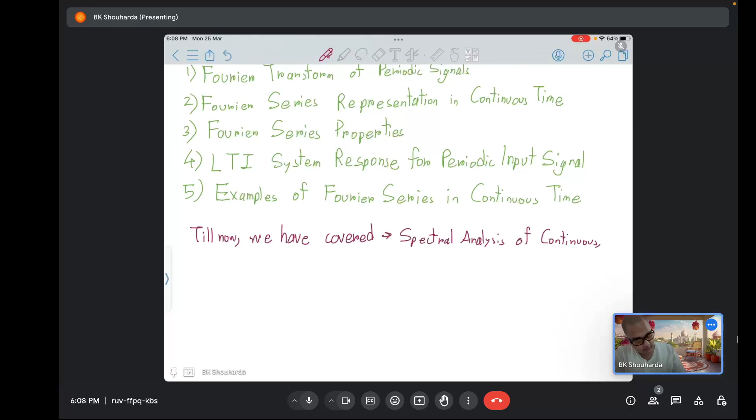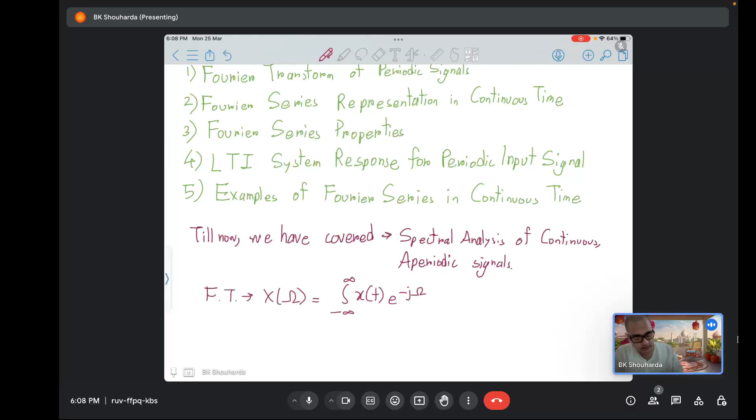So till now we have covered spectral analysis of continuous and aperiodic signals. Whenever we studied Fourier transform, X of omega was the integral from minus infinity to infinity of x of t e to the power minus j omega t dt. There was no restriction on x(t); it could have some variation, but it did not have any period. It was a generic, continuous time signal. We are dealing with continuous signals for now.

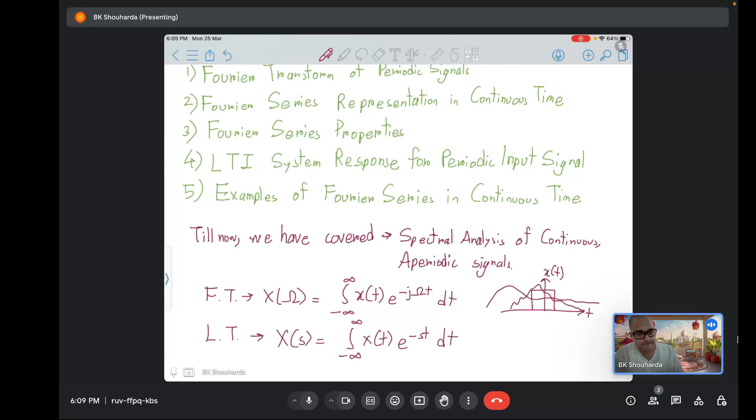And when we looked at Laplace transform, we had X of s is the integral from minus infinity to infinity of x of t e to the power minus st dt. So all of this holds for signals which are continuous and aperiodic. Now why am I saying aperiodic? Because one of the Dirichlet conditions, or DC in short, states that over the entire timeline from minus infinity to infinity, the integral of the absolute value of x(t) dt must be less than infinity. So the area under the signal must be finite.

And there were special cases, one being sin omega t and cos omega t. These were periodic signals, and we did not get to them directly. We made certain modifications or assumptions to assign sin omega t and cos omega t these spectra. The spectra of sine and cos are not normal functions; they are made of impulses, which are not standard functions whose differentiability, integrability and finiteness hold. We do it to make our analysis complete, because sin omega t and cos omega t are very important functions.

So let's say the triangular wave that you can see over here is our periodic signal. So you see, the signal is nothing to be scared about for not being able to do the spectral analysis. See, if I consider a finite window, and let's say the window has to be of the time interval T, and this entire window repeats itself. The window length is the time period of the signal.

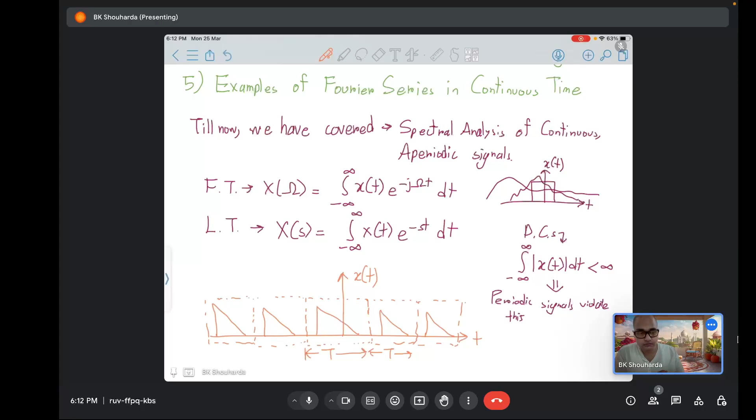Alright, so if I'm sticking to this small window and forget everything, and I do its spectral analysis, wouldn't that be useful? So what happens actually is that when we work with continuous time signals, we consider the signal within the window of the time period and then extend the properties. Okay, so periodic signals are a special case of continuous time signals, and correspondingly we have their spectral analysis or representation. I am not going into the proof of how we get the Fourier series from these things.

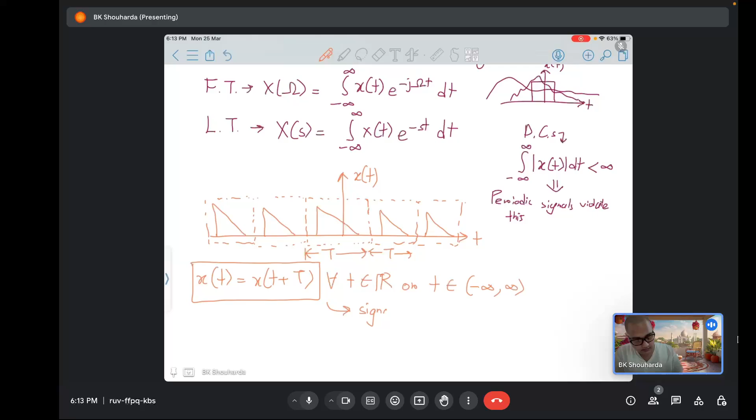So x(t) equals x(t + T) for all t belonging to the set of real numbers, or t belongs to minus infinity to infinity. This condition implies that our signal is periodic. All right, and what is the Fourier representation? We say that such a signal x(t), so these are periodic signals, and what is the most basic periodic signal that we know? Sinusoids, or cosine waves, or complex exponentials, right?

So just like the intuition of the Fourier transform, where we take all possible frequencies from minus infinity to infinity, or 0 to infinity and then their conjugates in case of real signals, we assign some weight to each sinusoid, add all of them up and we get the signal. In this case, this is periodic. So we will not be using all the possible frequencies. x(t) will be made up of periodic signals with frequencies same as or multiples of this frequency. Here it is repeating with a frequency f naught equals 1 upon T.

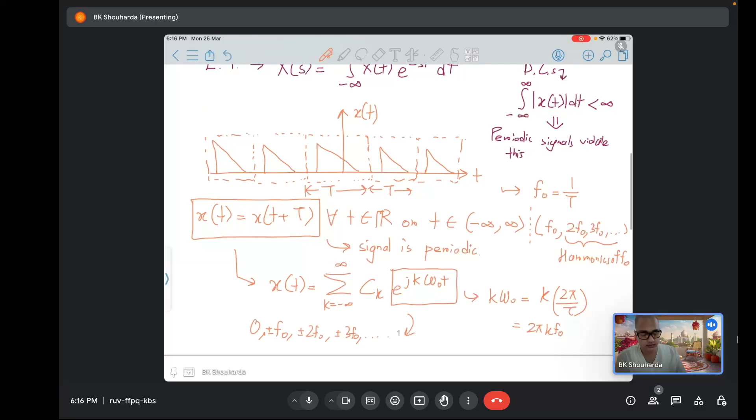Okay, so this is a complex exponential with frequency k omega naught, where omega naught is 2 pi upon T. Or you can also write it as 2 pi times k f naught. So you have the DC signal 0, plus minus f naught, plus minus 2f naught, plus minus 3f naught, and so on. So it's made up of complex exponentials. That's one way of writing. This is called the complex exponential Fourier series.

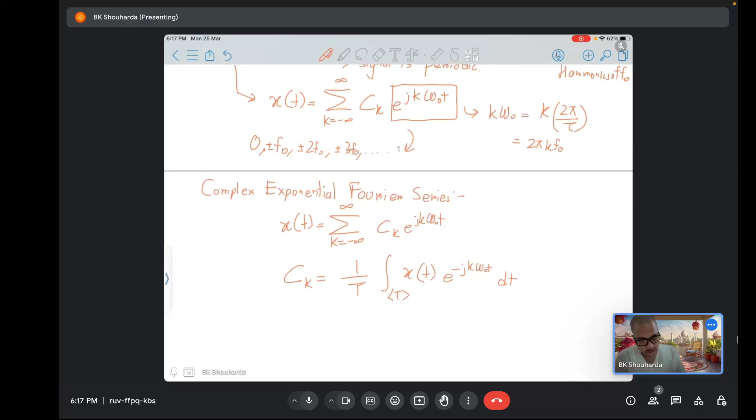x(t) is the summation from k equals minus infinity to infinity of c_k e to the power j k omega naught t. So what is the frequency component, the spectrum? The spectrum is this value c_k, which is 1 upon T times the integral over any window of length T of x(t) e to the power minus j k omega naught t dt. And how will the spectrum look? When we draw the spectrum, we always draw two parts, magnitude and phase. For the magnitude, this is |c_k|, and this is k.

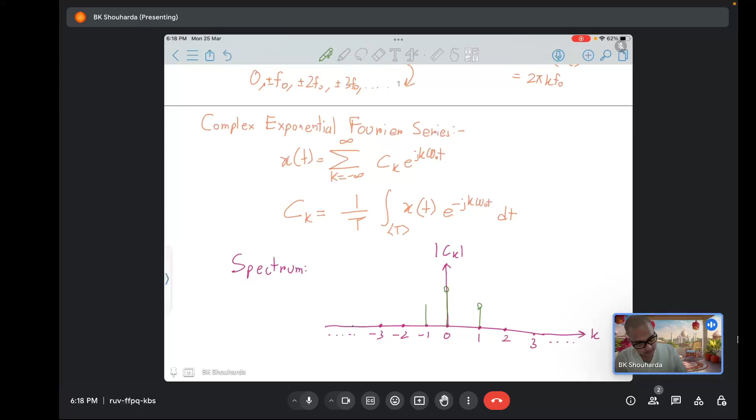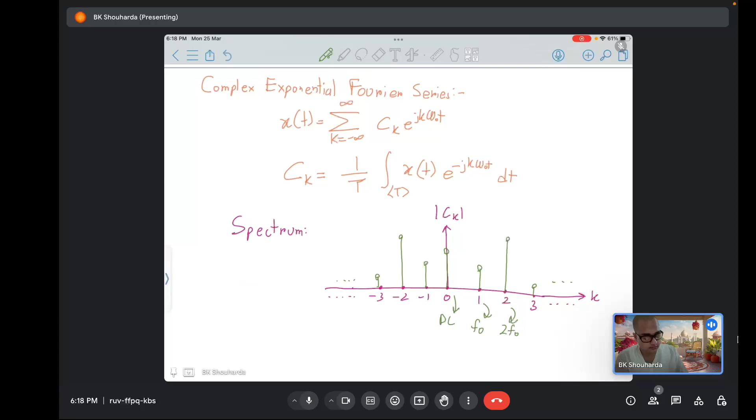So we'll have discrete indices 0, 1, 2, 3 and so on, -1, -2, -3 and so on. Let's say at 0 we have something like this, at 1 something like this. I'm assuming it's a real signal, so it will be symmetric. At 2, something like this, at 3 something small, and so on. So this is the magnitude of the DC component, this one is the magnitude of the sinusoid at frequency f0, this one at 2f0, this one at 3f0 and so on.

Okay, and what will the phase spectrum look like? Angle c_k. At 0, let's say it's 0, so you can't have any phase, that's a real signal. At 1, let's say something like this, at 2 something like this, 3 something like this and so on. At -1 it has to go down because it's anti-symmetric.

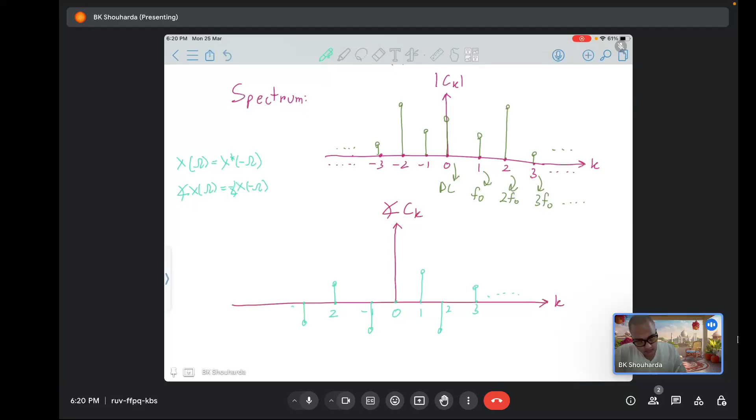Remember the property X(omega) equals X star of minus omega. So when you check the phase part, you get angle X(omega) is minus angle X(minus omega). Since the Fourier transform is more general, the same thing will hold for the periodic case. -2 will go up, -3 will go downwards, and this continues. Okay, so this is how the spectrum looks. So unlike the aperiodic case, where we used to have spectrums which looked continuous, in these cases the spectrum looks something like this.

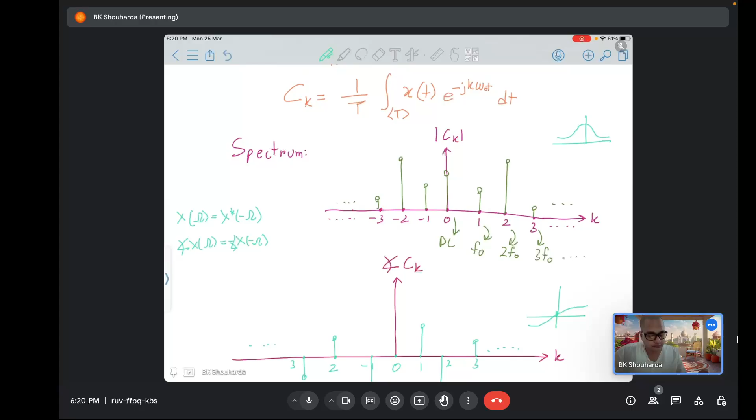That is not the case over here. Here these are discrete bins. Now this was the complex exponential Fourier series. Now there is another thing called the trigonometric Fourier series. What happens here? Here we write x(t) as a DC term, a0, plus summation over k equal to 1 to infinity of ak cosine k omega naught t plus bk sine k omega naught t.

So you see here we are writing it in a different way, but it's much more clear, much more intuitive, that we are writing the periodic signal as a summation of sinusoidal and cosinusoidal harmonics. Alright, where a naught is the DC or the average value, 1 upon T integral over T of x(t) dt, ak is 2 upon T integral over T of x(t) cosine k omega naught t dt, and bk is 2 upon T integral over T of x(t) sine k omega naught t dt.

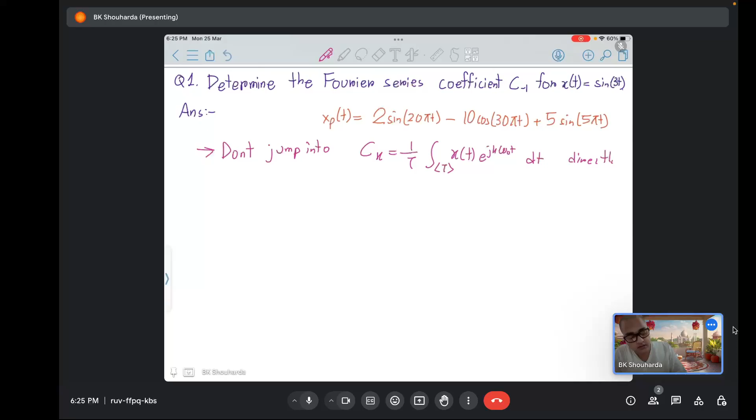Okay, so in those cases, don't directly jump into the formula. Let me give you another example. Let's say x(t) equals 2 sine of 20 pi t minus 10 cosine of 30 pi t plus 5 sine of 5 pi t. This can also be one example. I'll solve this later if you want. So for such questions, don't jump into ck equal to 1 upon T integral over T of x(t) e to the power minus j k omega naught t dt directly. Don't use this. Whenever you see only sines, don't jump into this.

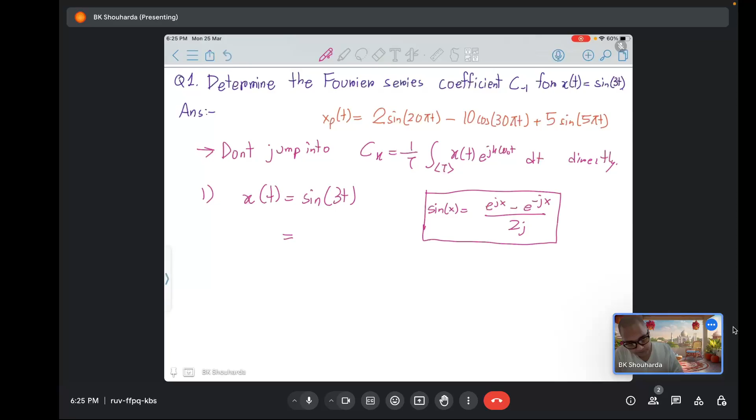What should you do actually? See, let's look at the first case. x(t) equals sine 3t. Now what is sine? Sine x is e to the power jx minus e to the power minus jx upon 2j, isn't it? I'll simply use this: e to the power j3t minus e to the power minus j3t upon 2j. Okay, now let's look at this. The fundamental is omega naught equal to 3 radians per second. So omega naught is 3.

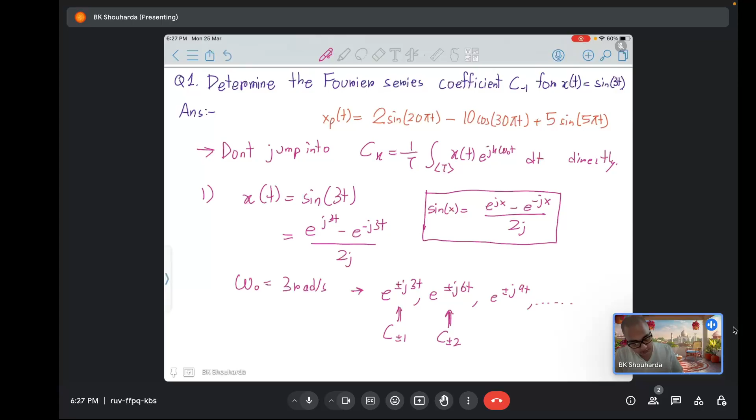So what are the multiples of 3 that you can see in this? You can have terms of the form e to the power plus minus j3t, e to the power plus minus j6t, j9t, and so on and so forth. We can have these exponential terms. Now this corresponds to k equals 1, c plus minus 1. This corresponds to c plus minus 2. This corresponds to c plus minus 3. Alright, so now what are the terms visible?

x(t): this is 1 upon 2j e to the power j3t. This is the first harmonic, the positive one. So what will I call this? I will call this c1. And why am I saying this? Because x(t) has to be represented as summation over k of ck e to the power j k omega naught t. Alright.

Okay, so I am trying to find out the ck's by looking at the exponential terms, and then we have minus 1 upon 2j e to the power minus j3t, because this is the negative first harmonic, so this is c of minus 1. So what do we get? We get c of minus 1 equal to minus 1 upon 2j, and this is our answer. Okay, now let me use the more elaborate one as well.

Copy image, paste image. Okay, so now in this case there are multiple frequency components. So first you have to check whether it's periodic or not. When there are multiple signals, then what do we check? We will check that, let's say their frequencies are f1, f2 and fn. We will check the ratios fi upon fj.

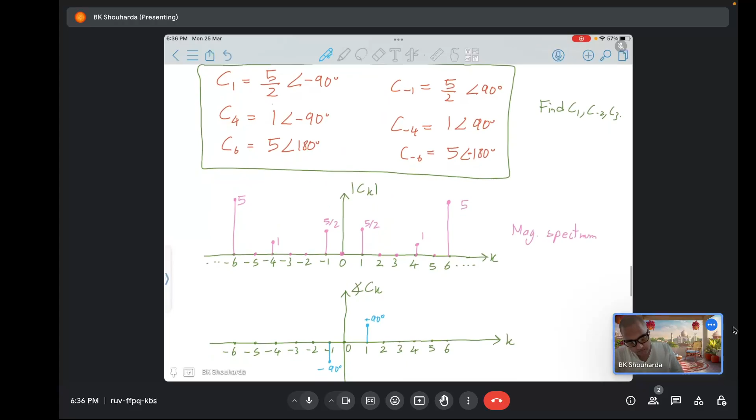Zero, 1, 2, 3, 4, 5, 6, minus 1, minus 2, minus 3, minus 4, minus 5 and minus 6. Okay, sorry, at 1 we have plus 90 and minus 90. Plus 90 degrees and minus 90 degrees. Okay, I think it should have been reversed.

Minus 90 degrees, plus 90 degrees, minus 90 degrees, plus 90 degrees, 180 degrees, minus 180 degrees, and this is the phase spectrum.

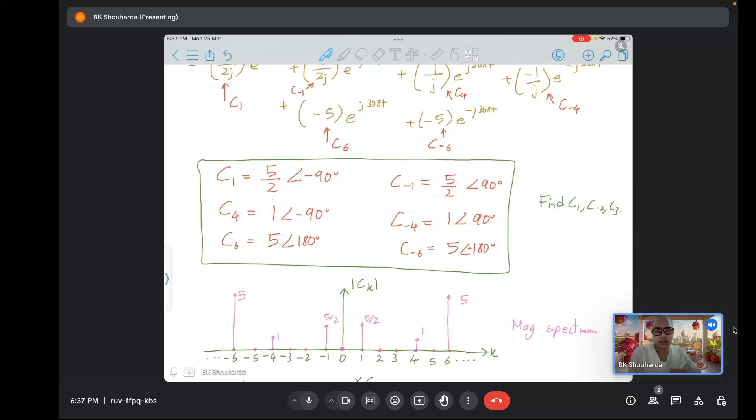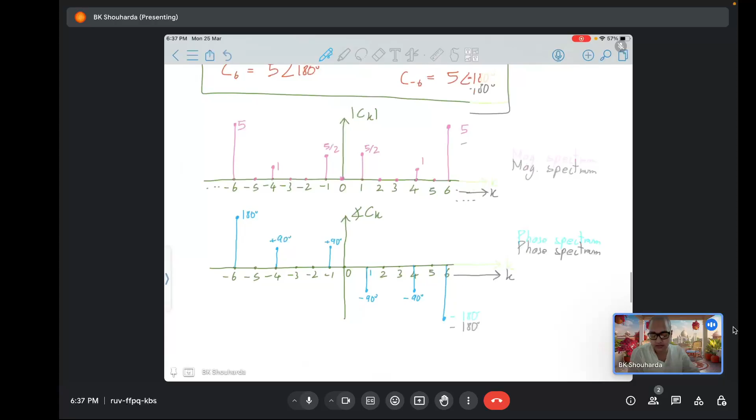So you see I have also given you an example of how to obtain the spectrum from this. In fact you do not need to draw this. Once you are able to get to this entire thing, you can easily check the spectrums and verify which one is correct, which one is wrong. So this is a very good and short way of solving this without going for the integral stuff. All right.

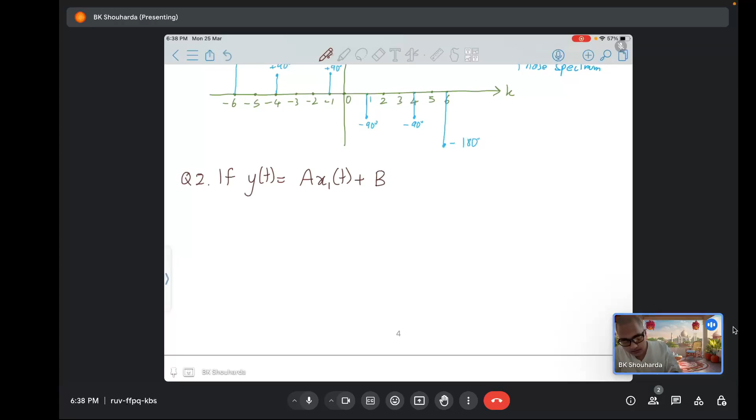And then the next question; I have actually told the answer of the next question during this explanation. If y(t) equals a x1(t) plus b x2(t), with period of x1(t) as T1 and x2(t) as T2, then the Fourier series for y(t) is only possible in case

option A, T1 plus T2 equals m for m belonging to the set of integers; B, T1 times T2 equals 1 upon m for m belonging to the set of integers; C, T1 into T2 equals m for m again in the set of integers; and D, T1 by T2 equals m for m belonging to the set of integers.

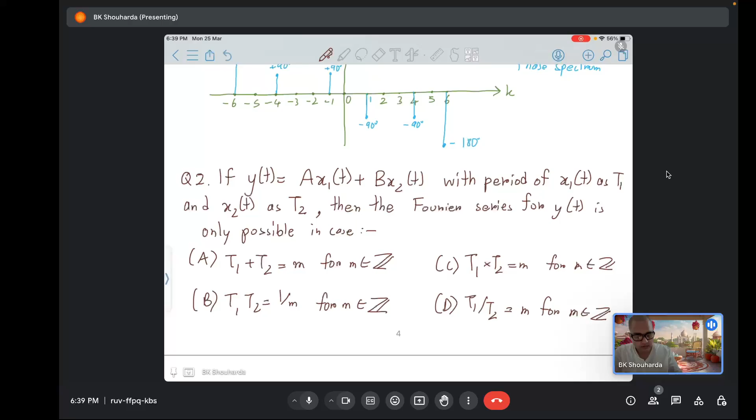Okay, so let me check once. Yeah, so if you remember carefully, we had talked about this, right? That we can write the frequencies as rational numbers, only then the signal is periodic. Okay, so which is the one that resembles closely? It's option D. T1 upon T2 is m.

So actually they are talking about the fundamental and harmonic and those concepts. Okay, so although it's given T1 upon T2 equals m, I'll give you a case where there's a periodic signal, but this need not be an integer. For example, let's say x(t) equals cos of 40 pi t plus sine of 60 pi t. What is the fundamental harmonic in this case? Here it's 20 hertz actually, and this one is 30 hertz.

So if you want to check the fundamental harmonic, what do we do? We take the highest common factor. Highest common factor of 20 and 30, what is that? It's 10. So basically these are harmonics of 10 hertz, that is 10 hertz is coming up as 20 hertz and 30 hertz. So the period T should actually be 1 upon the fundamental, that is 1 by 10, that is 0.1. Okay, so x of t plus 0.1, this is just for verification, nothing else.

Cos of 40 pi times t plus 0.1 plus sine of 60 pi times t plus 0.1, this is cos of 40 pi t plus 4 pi plus sine of 60 pi t plus 6 pi. So both 4 pi and 6 pi are multiples of 2 pi, so we have essentially the same shift of 0. So our signal is indeed periodic. You see, it's not necessary that T1 by T2 equals m, although they have given it in this previous year's assignment. It's a special case.

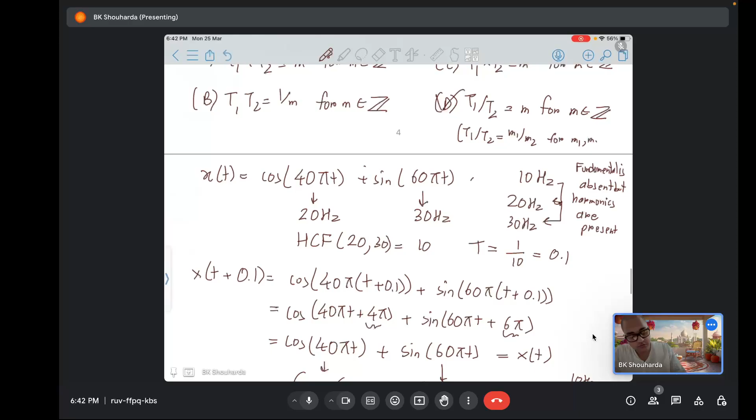So if once again I ask you to break this down, you will get c2 and c of minus 2, and here you will get c3 and c of minus 3, because c1, which corresponds to 10 hertz or 20 pi t, that 20 pi t term is not available in this x of t. So this is one thing to keep in mind. A signal may be periodic, but this is an example where the fundamental is absent, but harmonics are present. Okay, so in general this should be T1 by T2 equals m1 by m2 for m1 and m2 in the set of integers. Okay, so yeah, that's it.

Then question number 3: determine the Fourier series coefficients ak for y(t), which has a period T, where y(t) is equal to 1 for mod t less than T1 and 0 otherwise. Okay, so we actually need to find the complex exponential coefficients. So let us draw the signal first.

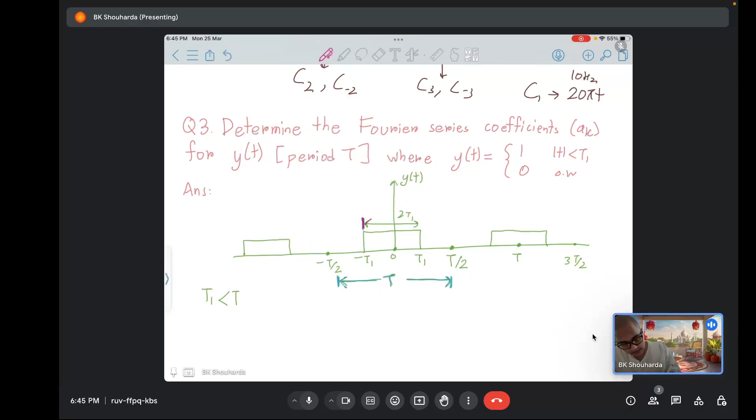So from minus T1 to T1, it remains like this, and it should be mentioned that T1 is obviously less than T, the period. From T to 2T this is 0. No, this should be T, this should be T by 2, this should be minus T upon 2, this should be 3T upon 2, and this is a width of 2T1. So you see this is a square wave that has a width different from the period. Let me use different colors. I have a window of size T, and here I am utilizing only a smaller part of it, 2T1.

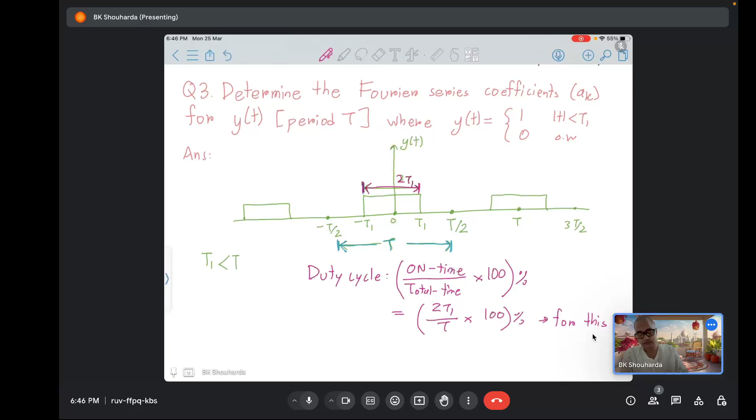So this ratio is called duty cycle. It is the on time divided by total time times 100. This is in percentage, or 2T1 by T times 100% for this question. Okay, so the normal square waves that we are familiar with in digital electronics, microprocessors, are generally 50% duty cycle, so they are on from minus T by 4 to T by 4, and for the rest half of the time they are in the off state. This is the duty cycle. Just stated it for general electronics knowledge. Now I'll show you the CK value.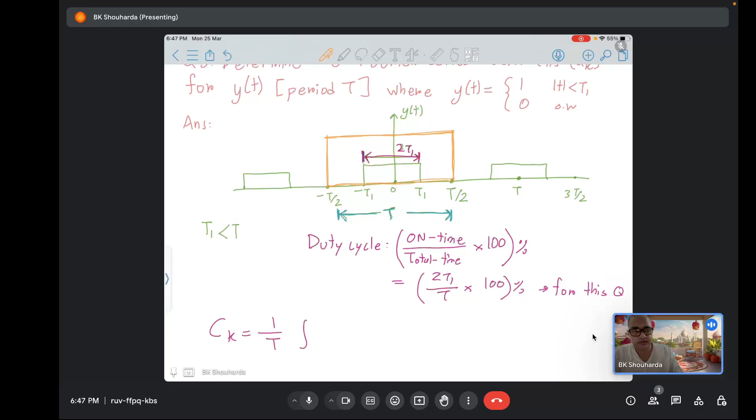CK is 1 upon T. What would be a suitable range of integral? The suitable range of integral window is this, because this is a symmetric window, and when you have symmetric things, a lot of the integrals become beautiful. We can apply symmetry properties; these complex sinusoids can turn into real stuff. Okay, so I'm taking the integral window from minus T by 2 to T by 2,

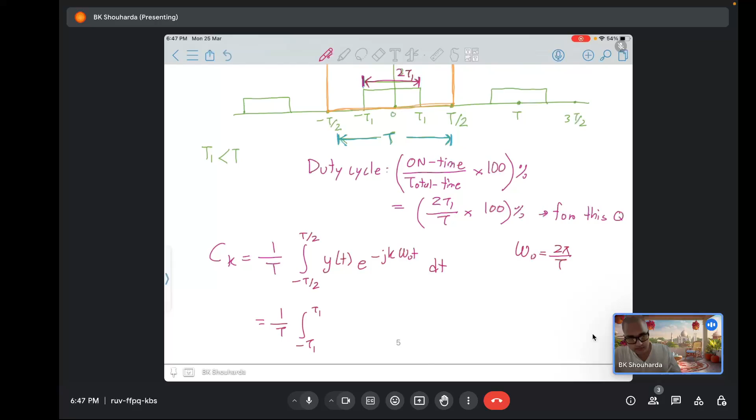y(t) e to the power minus jkω₀t dt. Omega naught is 2π upon period T, and if you see, it's actually on from minus t1 to t1 only. Okay, so 1 upon T integral over minus t1 to t1; y(t) is 1, so I am not writing it in this interval, e to the power minus jkω₀t dt.

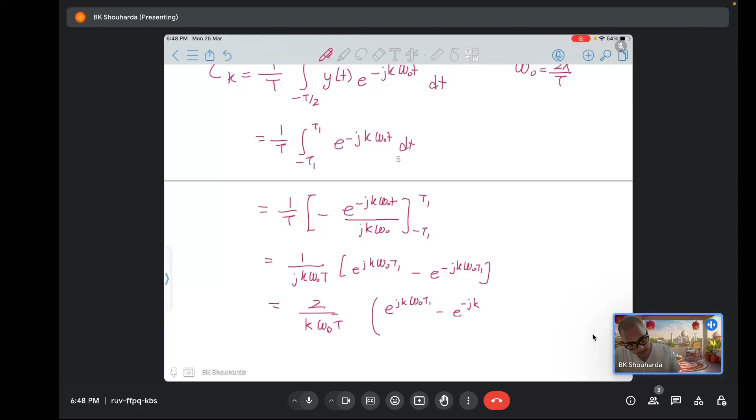1 upon T, minus e to the power minus jkω₀t, denominator we write jkω₀, from minus t1 to t1. 1 upon jkω₀T, e to the power jkω₀t1 minus e to the power minus jkω₀t1. So this is again the sin x form, so I need to take 2 from somewhere, so 2 upon kω₀T, e to the power jkω₀t1 minus exponential minus jkω₀t1, on 2j.

Now look at this, ω₀ into T is 2π, so 2 upon ω₀T will be 1 upon π. So what will I get here? 1 upon kπ, and what will be this over here? Sin kω₀t1. Okay, this is sin kω₀t1 by kπ, or 1 upon kπ sin 2πk t1 upon T. So you see, I can also write 1 upon kπ sin kπδ, where δ is 2t1 upon T, this is the duty cycle.

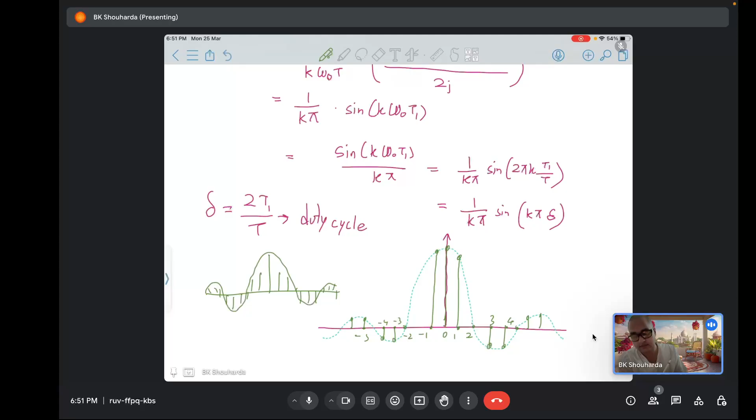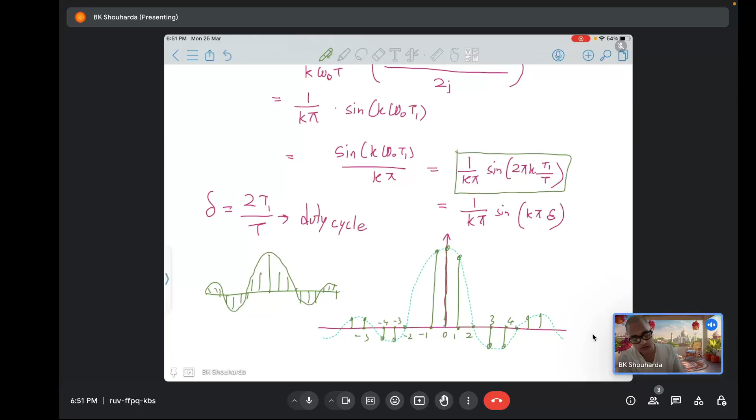pulses. From now on you must get familiar with this, because the same kind of functions are associated with pulses, and whenever you have a pulse you will see these waveforms coming up. Okay, so that's our answer, 1 upon kπ sin 2πk t1 upon T. This is a simple question, just the calculation was there, nothing else.

Then we have our next question. Time shifted signal x(t minus 3) will exhibit the Fourier series coefficient, in terms of ak, as: option A, ak e to the power minus j3kω₀; B, ak e to the power minus jkω₀ upon 3; C, ak upon 3 e to the power minus jkω₀ upon 3; D, 3ak e to the power minus jk3ω₀.

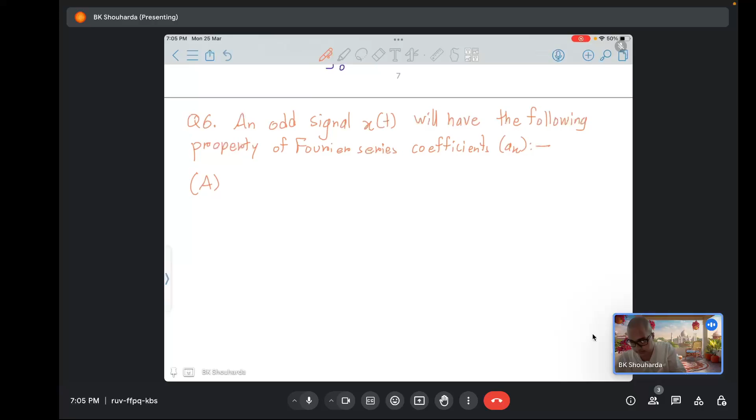Question 6. An odd signal x of t will have the following property of Fourier series coefficients ak: option A, ak equals a of minus k; option B, ak equals minus a of minus k; option C, ak equals minus k; and D, none of these properties.

So if you look at x(t), it can be written as summation ak e to the power j k omega naught t, and if you try to write x of minus t, you will see that it can be written as summation a of minus k e to the power j k omega naught t. Sorry, the minus sign will not be here. Now we know that for an odd signal, x of t is minus x of minus t. In order to do that, we should equate the Fourier coefficients. This is ak, and this one is minus a of minus k. So the Fourier series coefficients also behave in the odd way.

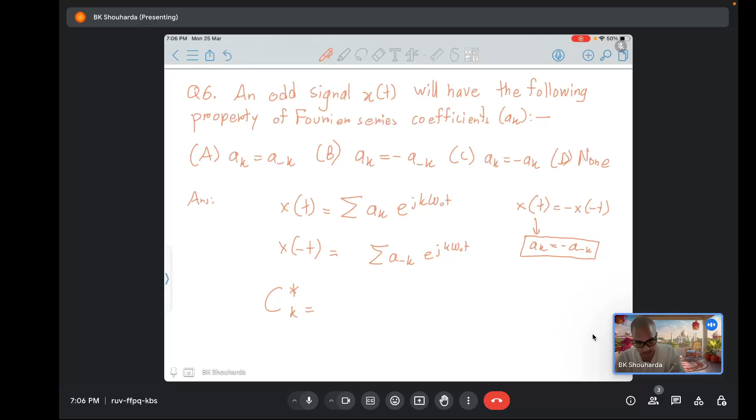So this is the answer. In general, actually, if you look into it, it should actually be C star of k is minus of C of minus k, because remember, for an odd signal x of omega is...

Okay, so ak is 1 upon T integral of x(t) e to the power j k omega naught t dt, dk is 1 upon T integral x of minus t e to the power j k omega naught t dt. Let me put tau equals to... what will that be? If I replace x(t), it will be minus x of t e to the power j k omega naught t dt. What is this?

Okay, so I should actually change the limits of the integral also, that would make it easier. 0 to T. dk is 1 upon T integral 0 to T x of minus t e to the power minus j k omega naught t dt. Put z as minus t: 1 upon T integral 0 to minus T x of z e to the power j k omega naught z, minus dz.

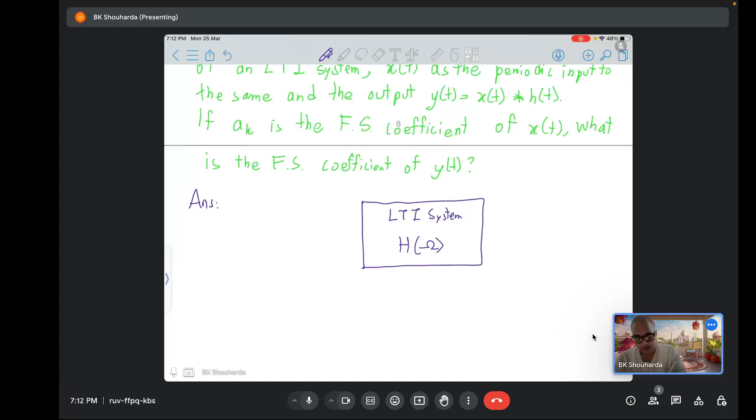Okay, so in order to solve this, we will be using the fundamental and important property of LTI systems, that is, for any LTI system with frequency response h of omega, if I apply a sinusoid a sine omega naught t as the input, the output y(t) will still be a sinusoid of the same frequency, but it will be amplified by modulus of h omega naught and a phase of h omega naught.

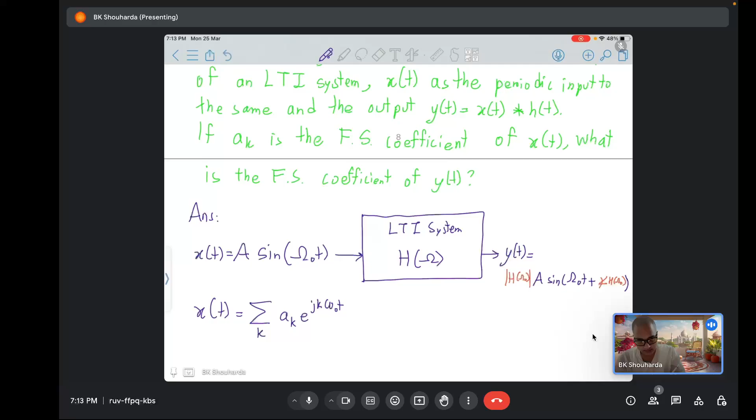Okay, so that's it. Now what are we saying? That x(t) is actually summation of complex exponentials ak e to the power j k omega naught t. Each has a frequency omega equals k omega naught. What is the corresponding response? The corresponding response is h k omega naught. This is a complex number.

Now what will happen? We know that y of omega equals x of omega times h of omega. In the frequency domain it is multiplication. So this is simply like a gain term applied to the frequency term of x(t). So your y(t) will eventually turn out to be summation a k h of k omega naught e to the power j k omega naught t. So the Fourier series coefficients are a k h of k omega naught. All right.

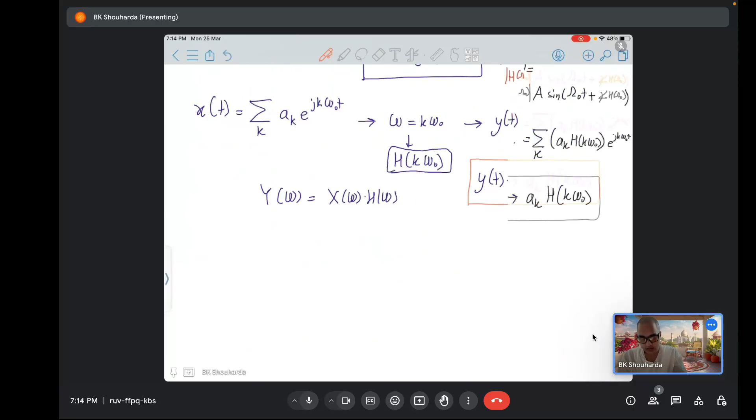Okay, so what does it actually give? It actually gives us the energy of a signal. And how do we calculate the energy of this signal? Over the period, it will be integral 0 to T mod of x of t whole square dt. And what will the value be? The value will be summation k equal to...

Well, although they mentioned the answer as energy, it should have been actually power, because periodic signals are not energy signals, they exist throughout, so you cannot have finite energy, they are power signals. So it will essentially be 1 upon T this thing. So it will be summation k from minus infinity to infinity of mod of a k square.

Why? Because for a single sinusoid a k e to the power j k omega naught t, if this is x of t, its power is mod of a k square, right? A single term. So when you have all the terms clubbed together in a summation, its power will also be summation of mod a k square.